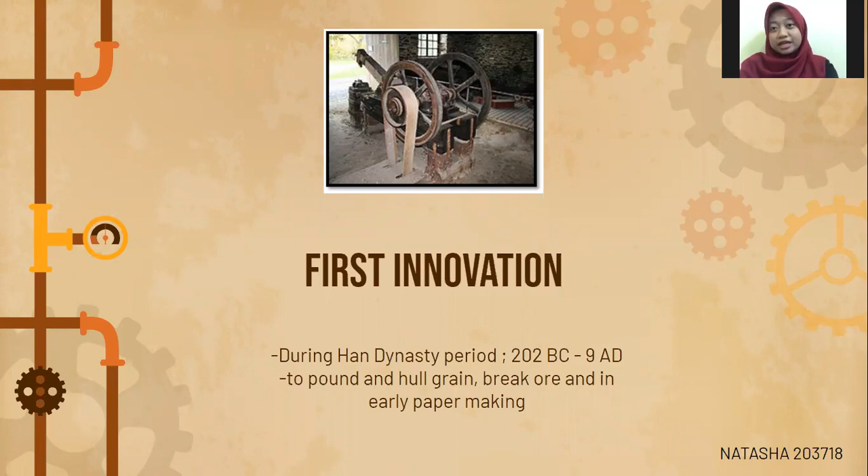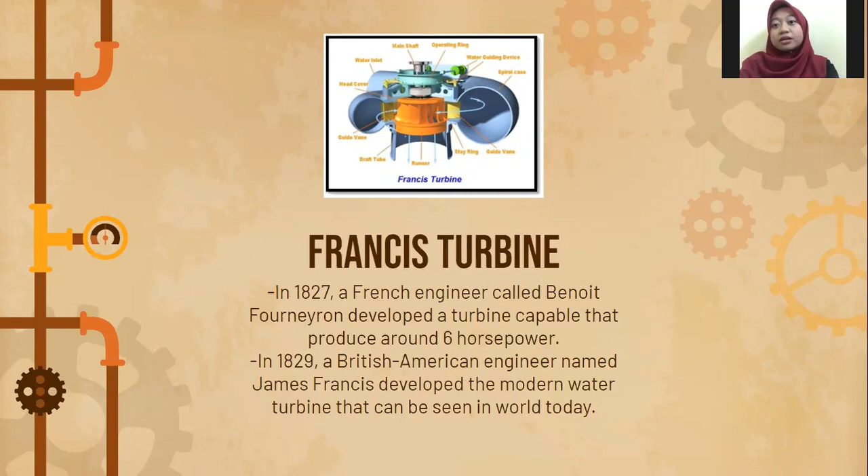Next, for the Francis turbine. In 1827, a French engineer called Benoit Fourneyron developed a turbine capable of producing around 6 horsepower. In 1829, a British-American engineer named James Francis developed the modern water turbine that can be seen in the world today.

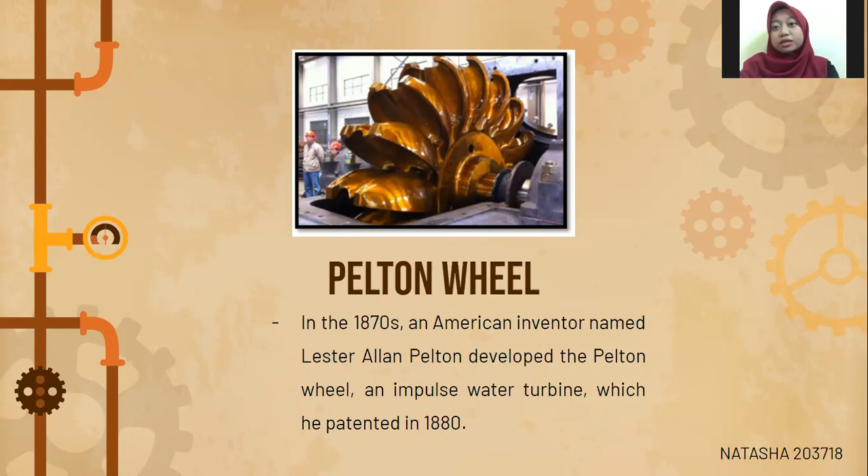For the Pelton wheel, in the 1870s, an American inventor named Lester Allan Pelton developed the Pelton wheel, an impulse water turbine, which he patented in 1880.

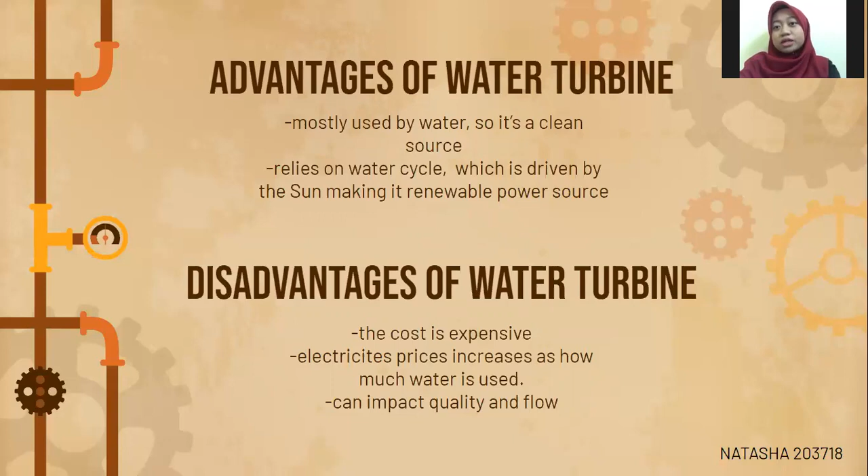For the advantages of water turbine, it is mostly powered by water, so it's a clean source. It also relies on the water cycle, which is driven by the sun, making it a renewable power source. However, there are some disadvantages. First, the cost is expensive. The electricity price increases as how much water is used. Next, it can impact water quality and flow.

There are 2 types of water turbine: reaction turbine and impulse turbine. Reaction turbine develops torque by reacting to the pressure or weight of a fluid, while impulse turbine is driven by high-velocity jets of water or steam from a nozzle directed to vanes or buckets attached to the wheel.

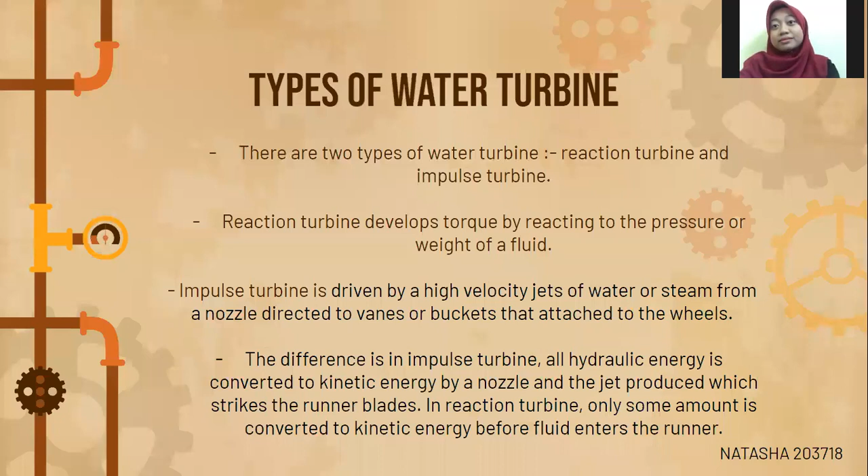For the efficiency, it can be as high as 95% for large installations. For smaller plants with output power less than 5 megawatts, it may have efficiencies between 80 to 85%. So that's all from literature review.

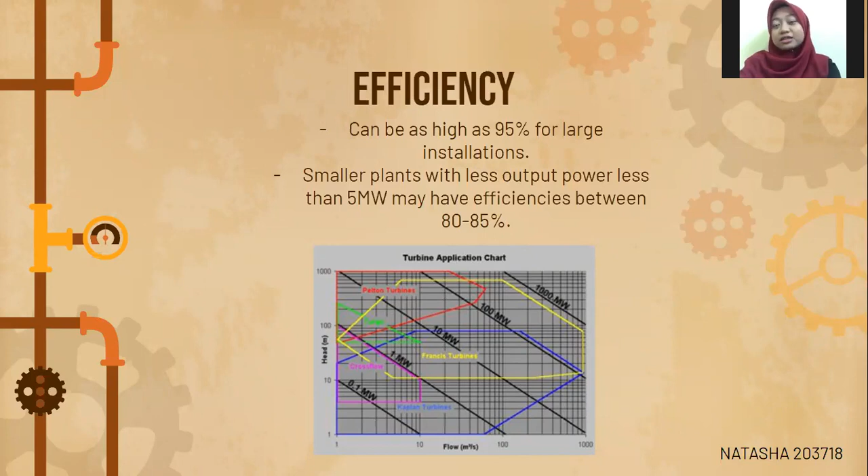Assalamualaikum. My name is Muhammad Adal Umar Bisni, my matrix number is 200596. I will explain about the concept of the system.

The system is about the conservation of energy using water turbine. Basically, water turbine is used as an alternative way to change kinetic energy to mechanical energy. After that, the metal shaft in the generator converts energy from the turbine to electrical energy, and then it is supplied by the transformers to the nearest home.

So how does this kinetic energy come from? It comes from the water moving from the dam, from a high place, and then falling in a vertical position to the water turbine. That will give the water high velocity and rotate the turbine.

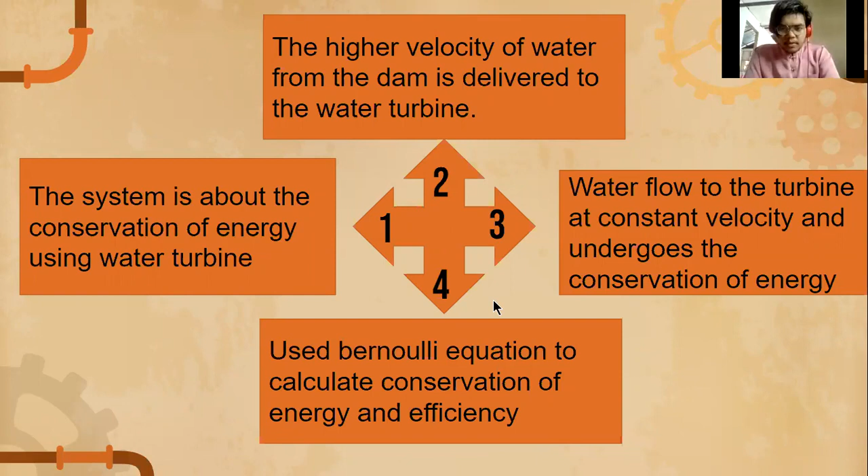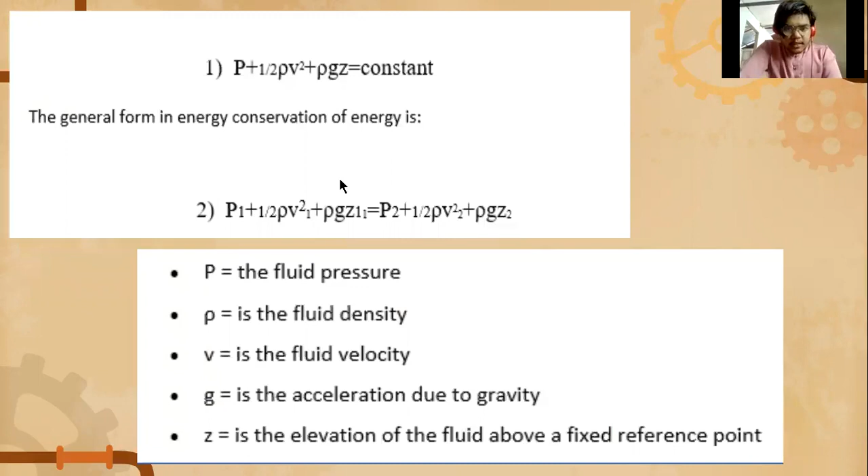So the water flows to the turbine at constant velocity and undergoes the conservation of energy. For our project, we will use the Bernoulli equation to calculate the conservation of energy and efficiency. This is the formula that we use, and I have mentioned it in our reports. That's all for my part.

Okay, we continue with the technical drawing.

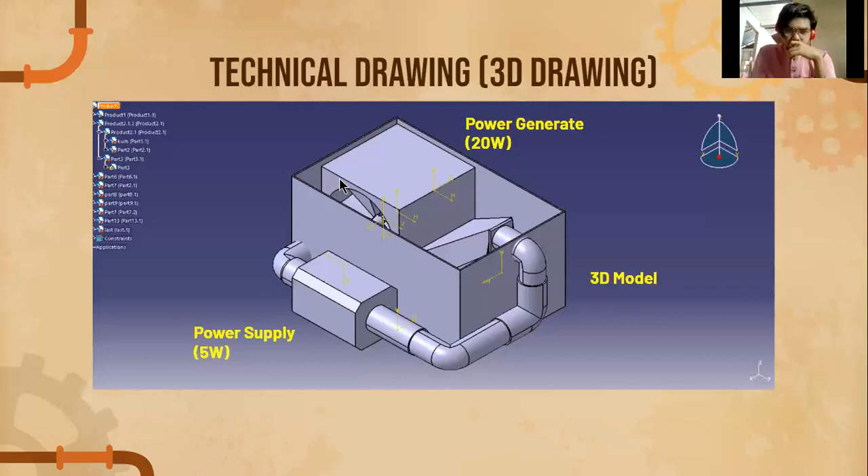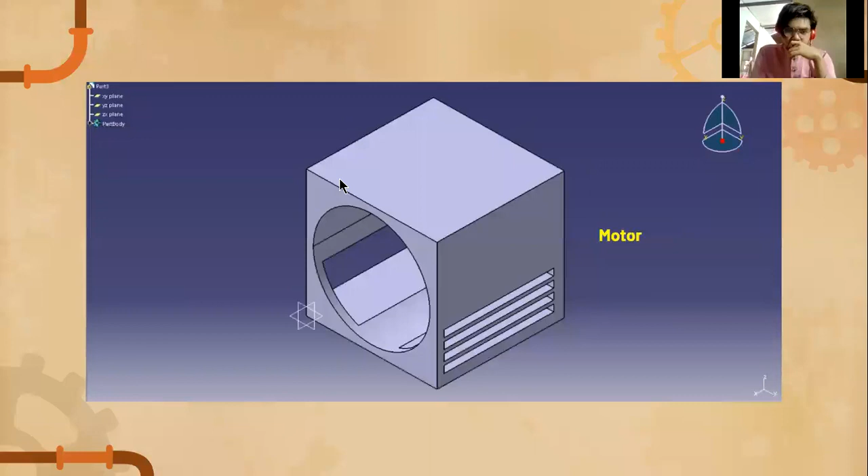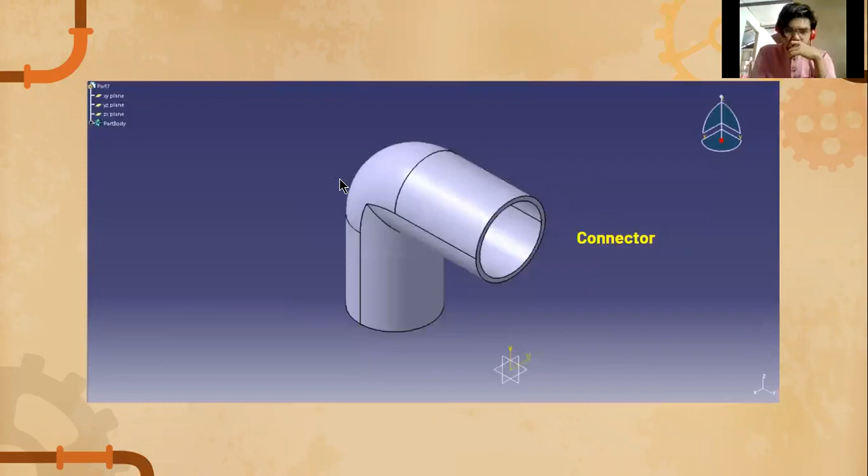Next, this is basically how each of the parts works. This is the turbine, the motor, the water pump, the water tub, the connector, and the last one is the water slider. That's all from me, thank you.

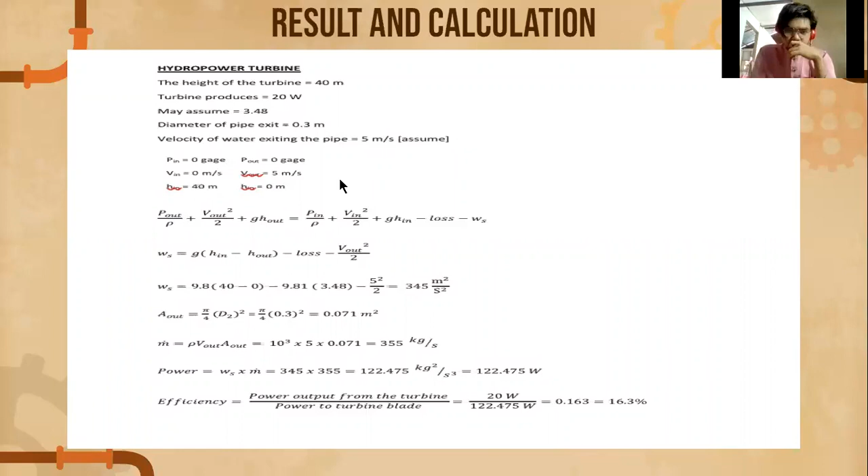I am going to present the result, calculation, and discussion. As you can see in the slide, we use the Bernoulli equation mentioned earlier by my teammates to calculate the power, and from the power we can calculate the efficiency of our design. We use the measurements from our design that have been done and explained by our team member Fazil. From this calculation, we only get 16.3% efficiency. I will explain why we get only 16.3% in our discussion.

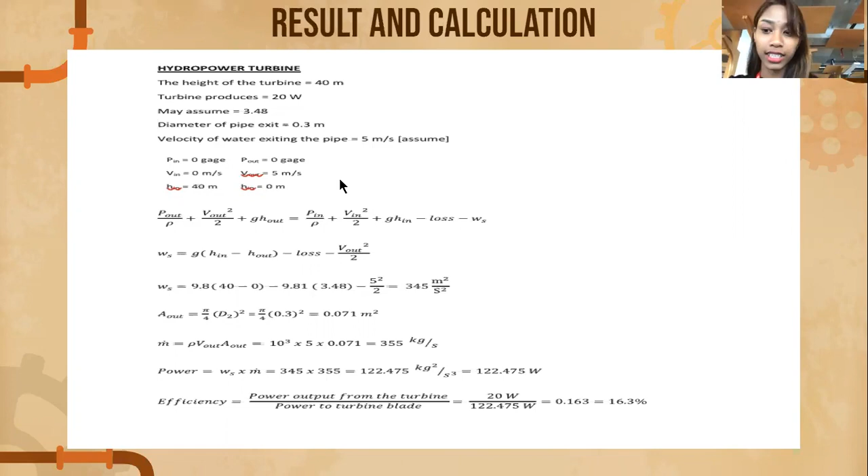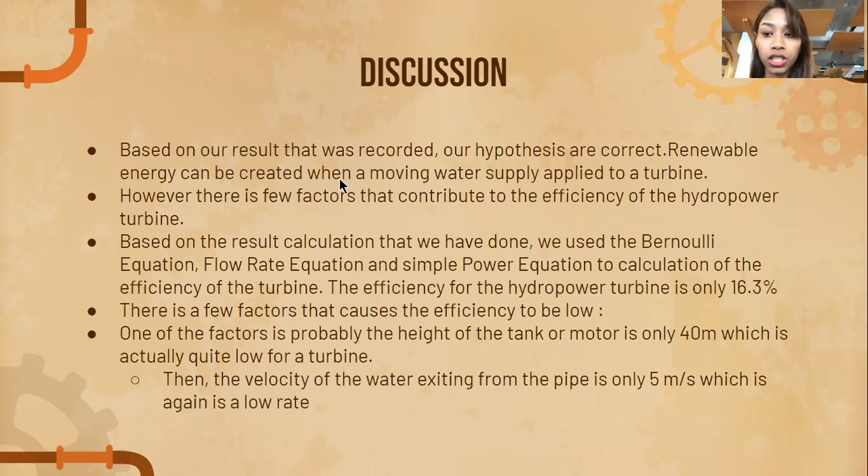Based on our recorded results, our hypothesis is correct, that renewable energy can be created when a moving water supply is applied to a turbine. However, there are a few factors that contribute to the efficiency of the hydropower turbine. The most important factors are the height of the tank and the velocity of the water. We only got 16.3% efficiency because our model only has a height of 40 meters, which is quite low for a turbine, and the water supply we use is normal water, so the velocity is only 5 meters per second. To increase the efficiency, you can increase the velocity of the water and increase the height of the water tank. That's all from me.